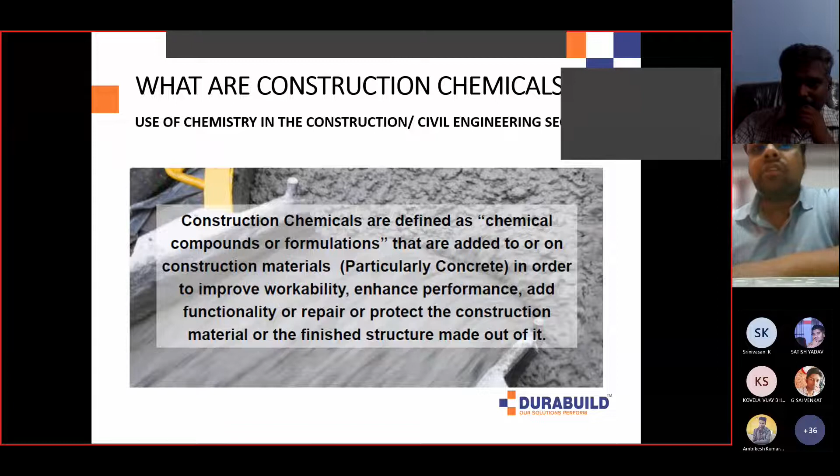So, construction chemicals broadly are defined as chemicals, compounds, or formulations that are added to the construction materials, particularly concrete, in order to improve their workability, enhance their performance, add functionality, repair, protect the construction material, or even the finished structure made out of it.

So, as we go along, I've done this slide for you, because I don't want to make this presentation very boring. First of all, let us understand, I'll try to break it down as much as I can, just like a layman, so that you can get some interest into this field. Then you can go out of this presentation, and do your own study if it interests you. And you can always come back to us.

I'll share my details in the last slide. So construction chemicals is nothing but the pharmacy. We call it the pharmacy of building materials. So I actually had a little, I have a creative side where I wrote this poem when I was doing my master's in structural engineering, where I was comparing cement with human beings, right?

So just like human beings have their life, cement also has a life which has evolved over the years. So just like human beings who can have various diseases or have problems, similarly concrete can also have diseases and problems of its own. So whether in human beings they have a problem of, say, a dehydration, and then you run to buy a glucon D or something to energize yourself.

Similarly, concrete can also have a problem of dehydration, which is called something like poor workability. So all of you have already studied your concrete technology courses, so you know what workability is. So that is nothing but when you don't have sufficient fluidity in the concrete. So that's a problem which many times concrete has.

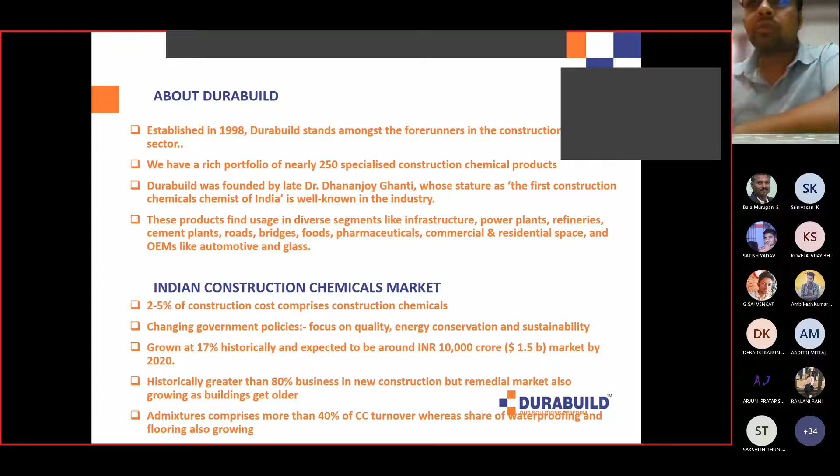First, let us understand why you need admixtures. Let us set the stage right now. Normal concrete is inherently porous, it is very well known. The average total pore content of any M30 grade concrete will be anything between 14 to 20% by volume. Many of you have already read about it.

It's a bit of a revision that mainly there are three major pores you will find inside concrete. There is the gel pores, which affects strength and durability. There is the capillary pores, which affects creep and shrinkage. And then you have entrapped air voids, which is due to poor compaction. There's a rule of thumb that for every 1% of air voids, there is a 5% strength loss.

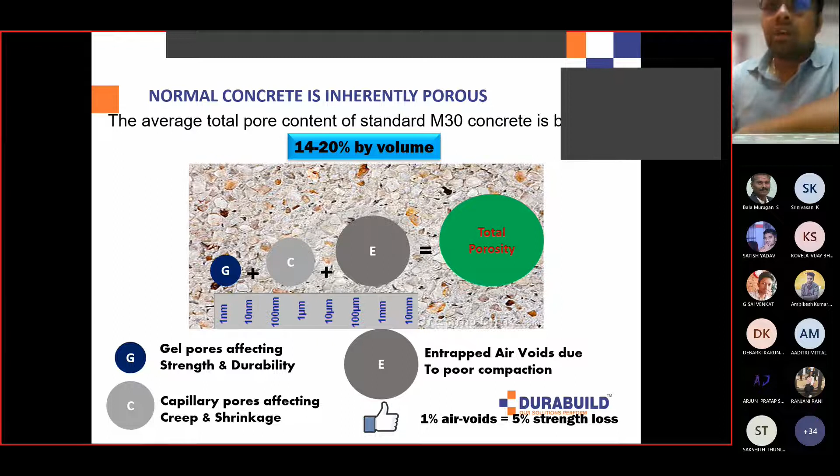Now, why is concrete porous? Let us understand that also. Let us take a typical concrete mix having cement of say 350 kgs. The water cement ratio is somewhere around 0.5. So the total water in the mix will be 175 liters.

Now, as per Neville, and I am sure many of you have read about MS Shetty, the great MS Shetty, the amount of water needed for hydration is only 0.28 water cement ratio, which comes out as 98 liters, needed for the hydration of the cement particles. But still we are adding 77 liters more water, which is also called the surplus or free water.

What is the purpose of adding this free water? That is to give the workability, to give a little flow to the concrete, so that otherwise the concrete does not flow and you cannot place it inside the slab. So this 77 liters of water, the negative side is it migrates to the surface of the concrete and leaves a network of interconnected capillary pores, which will have a volume of around 77 liters.

Now, as per this formula, almost 7 to 8% of the volume of concrete is porous network. Now you will be concerned - if you have a porous network, there is likely movement causing waterproofing issues later on. There'll be many more issues, cracks will happen, shrinkage, and so on. So our idea is, one of the possible ways of overcoming excessive water usage is to use admixtures. What you can do is reduce this water.

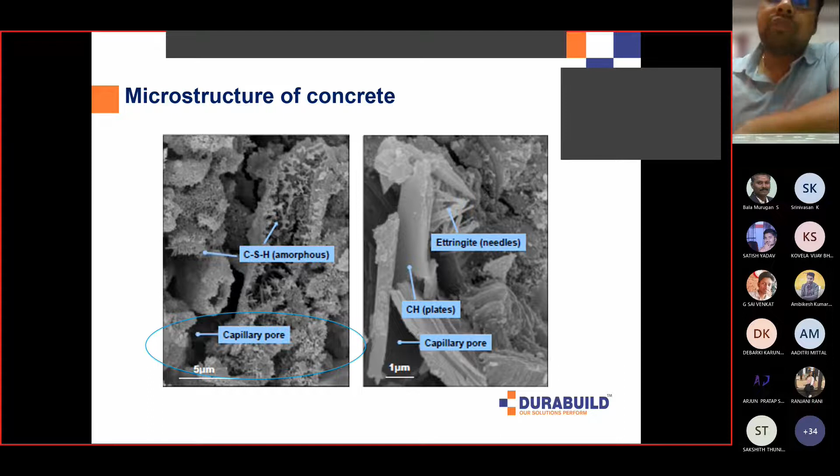Now what we are trying to do is bring down this water, use admixtures, and understand what are the types of admixture.

Let us understand that. In the market right now, there are mainly three types of admixture being used. One is lignosulfonate, that is a first generation admixture. A lignosulfonate admixture would reduce water up to 10%. So if you are having 180 kg of water, it will reduce water by around 15 to 18 kgs.

Then science improved, chemistry improved. Then we got something called naphthalene, SNF based admixtures. Now SNF based admixtures cause water reduction as high as 23%. So you can imagine there is much more water reduction, which would mean the strength increase will also be much more.

And finally, polycarboxylate ethers. These are the latest third, or you can say fourth generation admixtures, which are giving you water reduction as high as 40%, and also giving you strength increase, because obviously if the water comes down, the water cement ratio will also go down and the strength will go up.

Now you must be wondering, by reducing 20-30 liters of water in 1 cubic meter of concrete, how are we getting such kind of flow? The answer is, when you add these chemicals inside the concrete, there is a certain mechanism through which the cement particles liberate the water present within them, and that water is what gives you the flow. So it is not introducing any additional water inside the concrete.

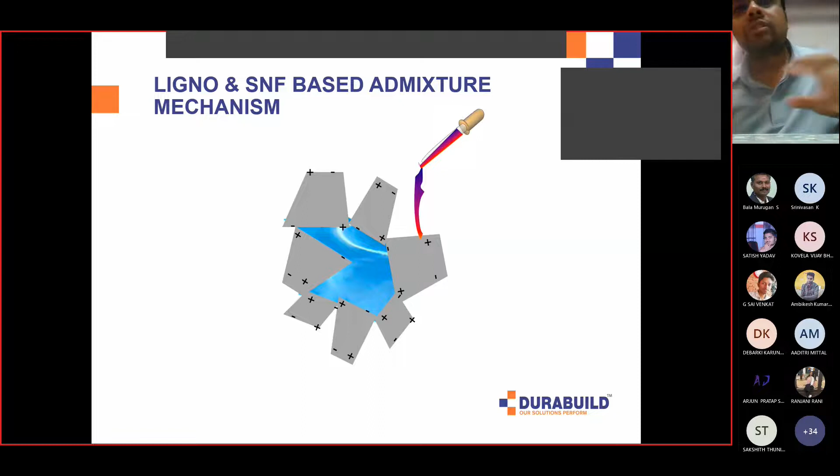And as many of you already know, like charges repel each other. So the moment you have negative charges, the cement particles automatically move away, and the moisture, or the water locked inside, gets released, and that's how you get the flow in the concrete.

Number two, if you want to reduce the bleeding and the segregation, one of the ways of doing it is to reduce the water content, and that again will happen only by using admixtures.

Next is cold joint removal. Why am I saying cold joint removal? The same thing - when you are concreting and then leaving it overnight, and then the next day, or maybe continuing after 3-4 hours, the concrete need not set. The concrete has to be, somewhere we say it is still alive, so that even when the next level of concrete is poured inside it, the two get intermixed. If this concrete sets and then you put another layer of concrete, again a joint will be formed, which can be a potential point of water ingress and so on. So for that also admixtures are used.

Also, it reduces the drying shrinkage. That is again a byproduct of reducing the amount of water content.

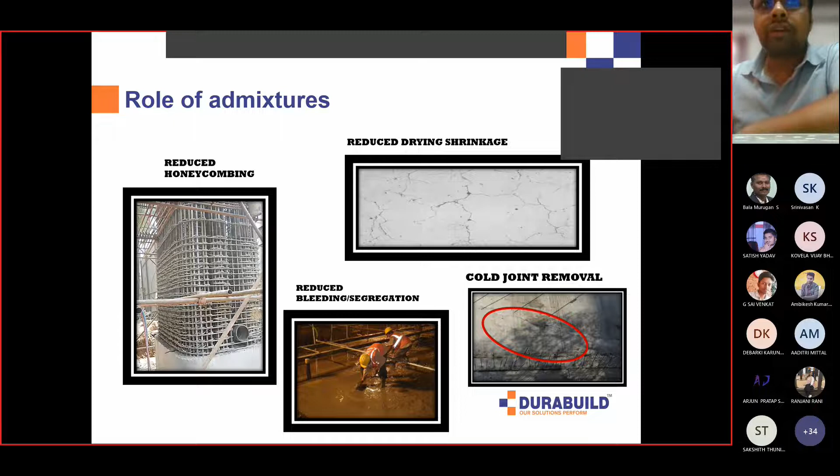Another role of admixtures is ease in transportation and placing. You can see this particular photo, and here's this video again, just to put things into perspective. You'll be able to understand the advantage of having admixtures. I'll fast forward it a little bit.

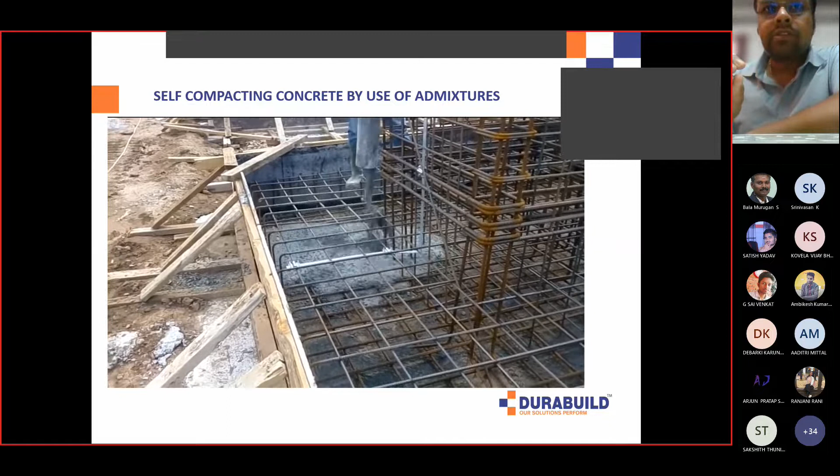You can see this is a dense structure. Now look at this concrete. It's so beautiful, almost like a self-compacting concrete. It is compacting on its own, flowing on its own. It doesn't need to be taken out using trowels like people normally use. It is flowing on its own.

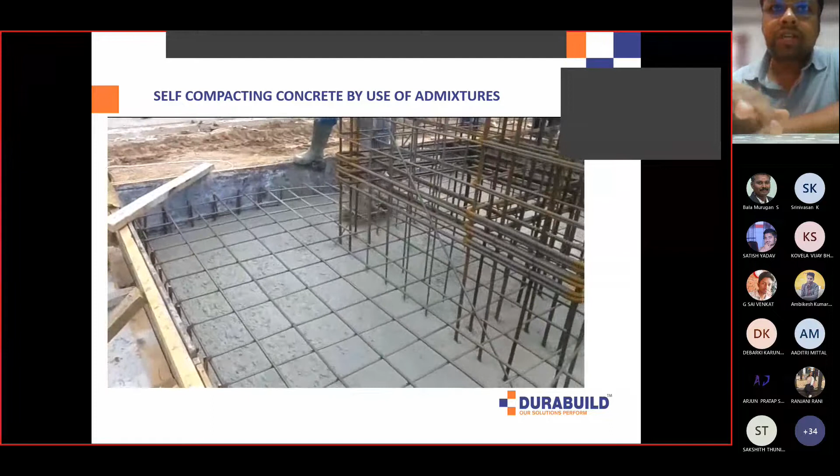Look at the concrete mix - there is no segregation, no bleeding, everything is moving in unison. Imagine cement, aggregates, everything has a different specific gravity, and still to bring everything together and make it move easily together is only possible through the use of admixtures. It's a very good video to understand the potential of an admixture.

Fine, I think we will just quickly move on to the next slide.

That's understood. So now we will talk about waterproofing. This is a very important field because, as sir said a while back, Tamil Nadu, Chennai is going through a bad time right now with all the rainfall. So there will be huge requirements for waterproofing.

First, let us understand what waterproofing is. Waterproofing is the formation of a barrier to prevent passage of water through concrete due to various water transport mechanisms involving penetration through concrete and openings. In short, it is a way to create a barrier to prevent any moisture ingress.

In technical terms, waterproofing deals with situations in the presence of hydrostatic pressure. What is hydrostatic pressure? If you have a concrete water tank, the lowermost slab, or a swimming pool, when you put water on top, say 2 or 3 meters of water height, it will exert some kind of pressure on the concrete slab.

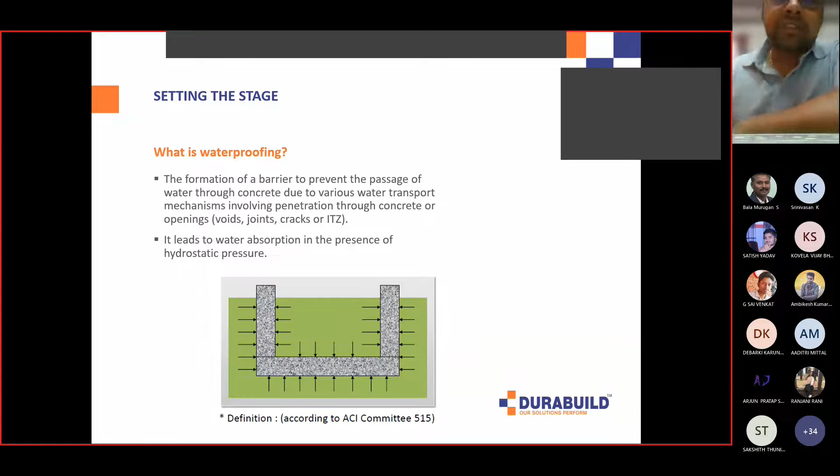This height of water is likely to cause issues because under hydrostatic pressure, this water can penetrate through any cracks or joints present inside the concrete and cause issues with the steel. So waterproofing deals with the presence of hydrostatic pressure, whereas damp proofing is the reverse - it is in the absence of any hydrostatic pressure.

Many of you, if you go back to your old homes - I'm sure today all of you are well endowed with good homes - but earlier, during our dad's time or grandfather's time, the basement floors usually faced what we call in Hindi 'papdi' - you'll see dampness and seepage happening at the ground floor.

Now you'll say there is no hydrostatic pressure there, but how is that water reaching there? It is because of capillary action - the water present in the ground floor or below the ground area, that moisture rises through capillary suction, causing dampness and rising up the walls of the ground floor. So this is actually not a waterproofing problem, it's a damp proofing problem.

Now you need to understand there is a difference between leakage, seepage, and dampness. Leakage is a continuous flow of water - that's when you say leakage is happening. Seepage is the formation of water globules, but not necessarily moving - it will just be there. Thirdly, dampness is just visible moisture, as I was talking about.

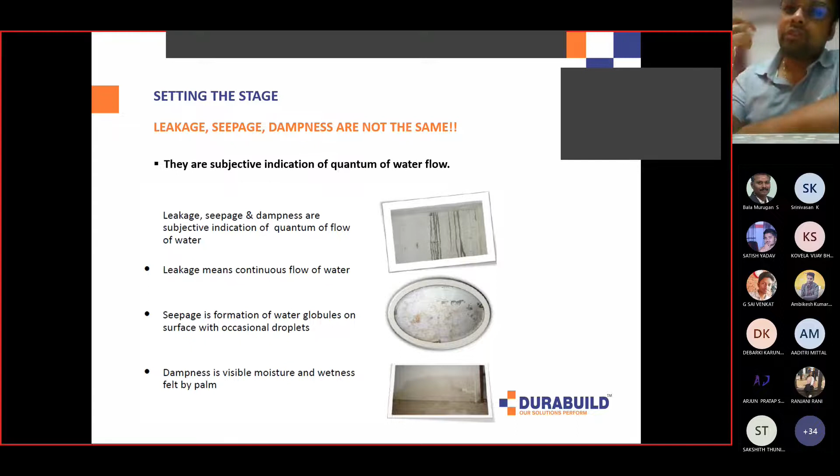You can see this last photo - there is dampness and wetness which you can feel by palm. If you run a hand over it, you will see there is a lot of moisture there. So that is a dampness issue.

Now let us understand why we need waterproofing. It is important to go behind the science of why waterproofing is needed.

Porosity and permeability are not the same thing at all. A highly porous material might perform well as long as the pores are not interconnected. But in a case where the pores are interconnected, even if the pores are less, it is a much more dangerous situation. A high porosity and low permeability case would be when the pores are not interconnected, but the moment they are interconnected, you allow free passage of water to the steel and the entire concrete mass. So you may have a highly porous concrete that is not highly permeable, and at the same time, a less porous concrete that is still highly permeable.

This is not porosity because of any one of our actions, but what happens on site because of some anthropogenic or human actions, or some mistakes that the quality manager of a site makes, there can be reasons of permeability inside concrete as well. One reason is poor compaction. If you don't compact the concrete, you will not release the entrapped air voids, and those air voids can be potential points of entry of water.

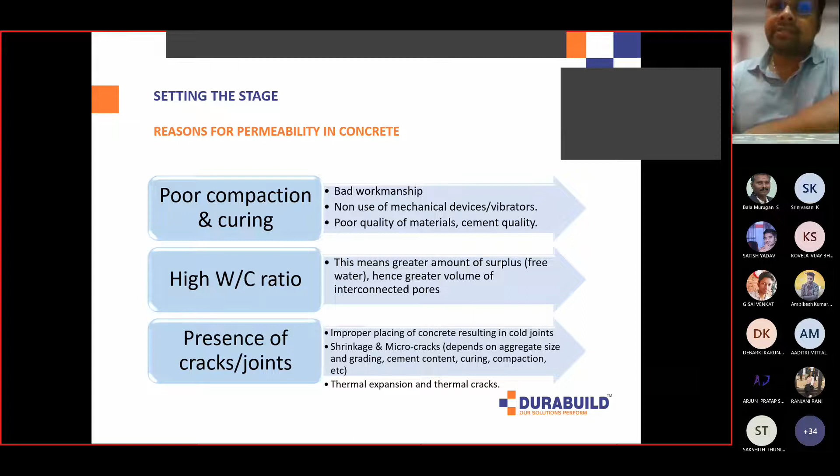So what will happen is once these cracks interconnect, they will leave a kind of interconnected line, and then you will have steel somewhere at the bottom. Let's just see what happens.

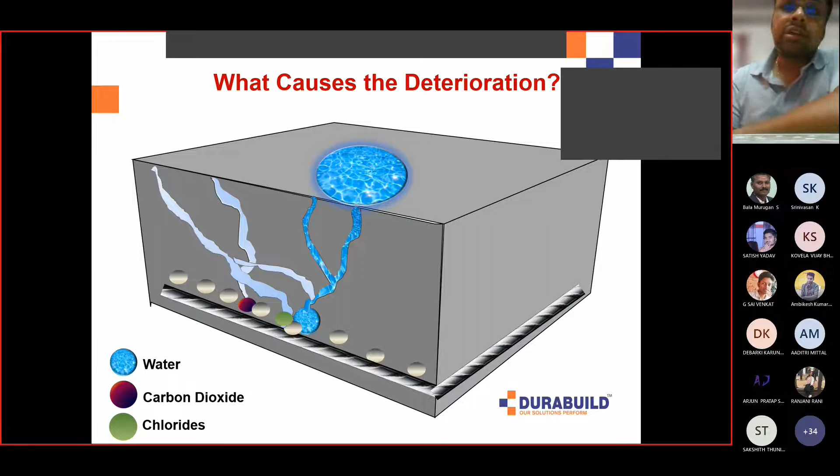The water will start entering inside that concrete and come closer to the steel. Then carbon dioxide will enter through those pores into the steel, and then you will have chlorides if it's close to the sea water, or close to a beach, like Chennai which is next to the coast, so that's where you will experience this kind of problem. Now, the moment these three ingredients reach inside the steel, they initiate a process called corrosion, which I am sure many of you have already read about.

I don't want to talk about it in detail, but simply put, in corrosion you will have two places: there will be an anode and a cathode. So all the rust gets accumulated at the point of the anode, and the moment that rust accumulates, the volume of this rust is almost 6 to 7 times more than the steel itself. So automatically, to accommodate that volume, it will crack, and that's where the cracking and spalling happens.

Many of you already know that is why people say you should always try to keep the concrete in an alkaline state, because the moment it is in alkaline state, you will not have these corrosion problems. A classic analog I can use is even the human body. We are happy when we are in an alkaline state.

The moment you eat outside, some kind of pakoda or oily food, I think in South India dosa and idli are very safe foods, but sometimes when you are having some oily food outside, it tends to cause acidity, because that reduces the pH inside our body and causes us issues, and then we are huffing and puffing.

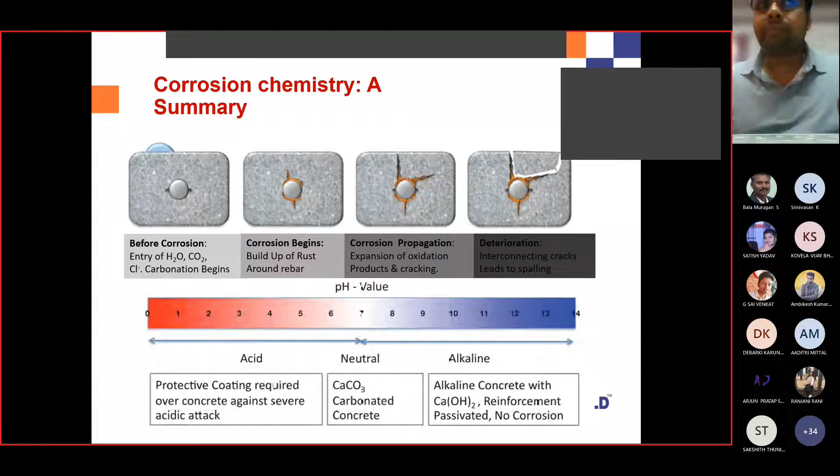So overall you can see there are around 9 to 10 deterioration mechanisms, something more than 11 in fact, but I identified all these deterioration mechanisms inside concrete: erosion, thermal cracking, drying shrinkage, plastic shrinkage, alkali aggregate reaction.

Many of you have read about it, I think. Chemical attack, freeze and thaw, rebar corrosion through external chlorides to internal chlorides through carbonation.

So all of these deterioration mechanisms inside a concrete, what is the common point to all of them? It's water. So it is very clear that we have to find a way to keep water outside the concrete.

Now you will be confused, as I was when I first heard about it, that in one place we say water is mandatory for concrete because it causes hydration. On the other hand, we say this water is also the main reason for all the problems the concrete is facing. So it's a double-edged sword, you can say.

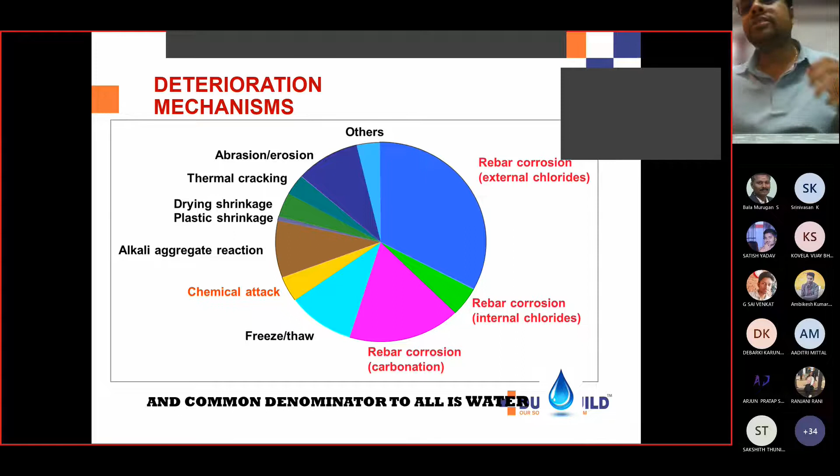So in the plastic state, we want water to be there inside the concrete because that is where the hydration of the cement particles is happening. But the moment the concrete has reached a hardened state, you do not want any water to enter inside the concrete. And what is one of the ways of doing that? It is through waterproofing. And that is where we have arrived at waterproofing is important.

Earlier, many of you must have seen our great grandfathers and all. They use something called the bucket technology. The moment there will be some seepage or leakage from some kind of ceiling and all, they will use a bucket, and the entire problem will be resolved.

But now luckily, earlier there were uses of bitumen. People used to think that black is waterproofing. That is a wrong thinking to have. Never have that thinking. Bituminous products, first of all, are health hazards, many of you know. Number two, they do not have any UV resistance. They're likely to degrade over a period of time.

So these are old school ways of waterproofing which people used, and now people have moved out of that system. Another way of doing waterproofing earlier was creating a slope. I feel that making a slope is the best way to waterproof any terrace, because the moment you allow water to sit over the terrace for a long period of time, you will have waterproofing issues. So one way of doing it is to make a slope so that it goes to the nearest drain point, and then the water gets collected and goes through the pipes to the eventual place.

So now we'll talk about the types of waterproofing. Waterproofing is essentially of two types: integral and external. Integral waterproofing is where you are putting the waterproofing material compound inside the concrete, and that is where the action happens. And the second way of doing it is you let the concreting happen.

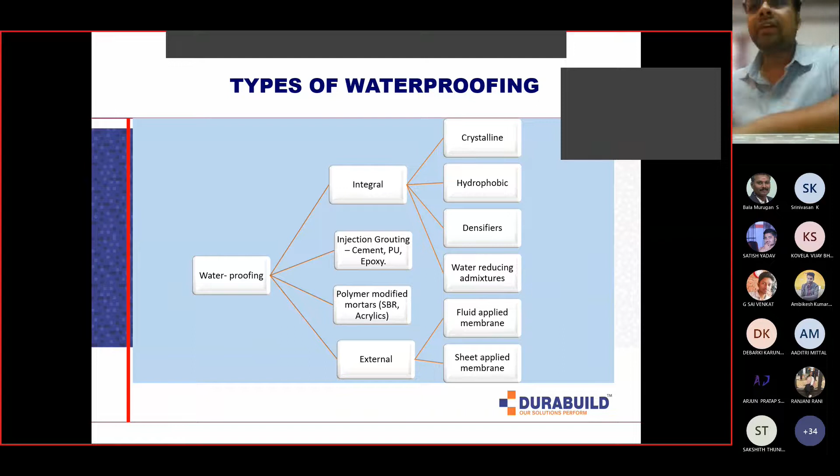It's more of a post-construction treatment, where the concreting has happened and then you are applying a coating or a sheet membrane on top of it, and that is how you are waterproofing.

What are the typical properties of any waterproofing material? I think I will skip this since it is very well known. A main property should be that it resists water, that is very important. Other than that, it should have good UV resistance, and it should have good bonding with the base substrate. So all these things should be there.

So let us talk about crystalline waterproofing, how it looks like. This is one of our products, which we'll put the video on, maybe you will be able to understand how a crystalline product works. It is again a type of integral waterproofing.

Crystalline waterproofing, I'll give you a bit of a brief. These are like powders, looks like a cementitious powder. It is added inside the concrete when you're making it. This crystalline powder reacts with the byproducts of cement hydration. The moment there is a leakage, there is water moisture ingress, and in the presence of that moisture, the entire crystals get activated. So the moment those crystals are activated, it physically blocks those pores, and automatically you get a waterproof concrete.

So we'll see this video, you will be able to understand.

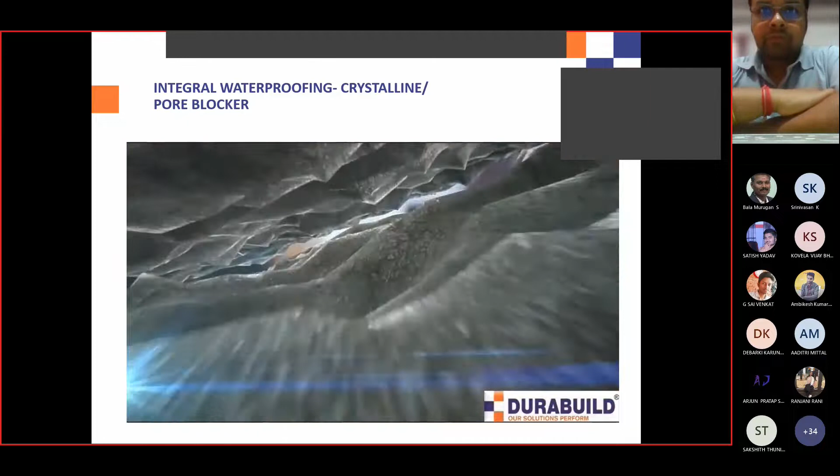You can see that when the moisture enters, crystals are formed, and these crystals are the ones... you can move to the next slide now.

So that is one. Other than that, there is another form of integral waterproofing called hydrophobic pore lining products. Hydrophobic pore lining products are different from the pore blocking technology. In pore blocking technology, it is physically blocking the pore. Another way of doing it is if we can line those pores with a chemical which can resist water. So that is more of a chemical mechanism, whereas the earlier one was more of a physical mechanism.

These pore liners, many of you must have heard about, say silicone repellents. Imagine when you have a sunmica table and you put a drop of water on top of it, the water will remain like a drop, a bead effect will be there. It would not absorb that moisture. That is because of this kind of product there, silicones, siloxanes, and silanes, that's another family of products. I'm not getting into technical stuff, but you need to understand there are pore lining technologies which can create this kind of effect, as you can see.

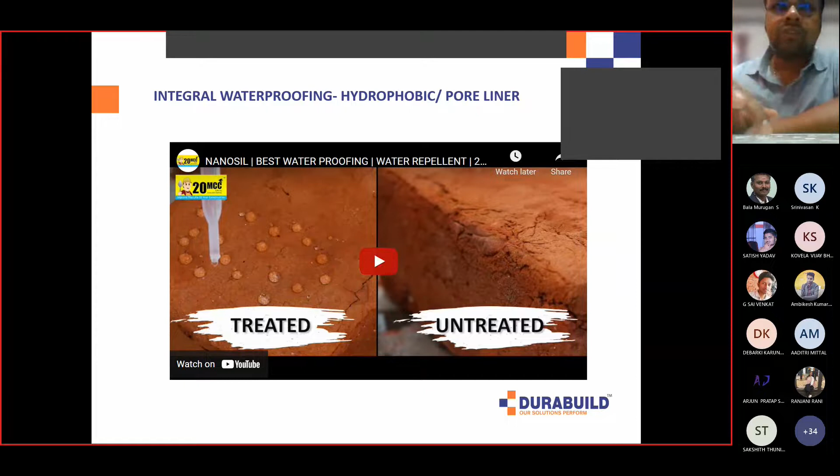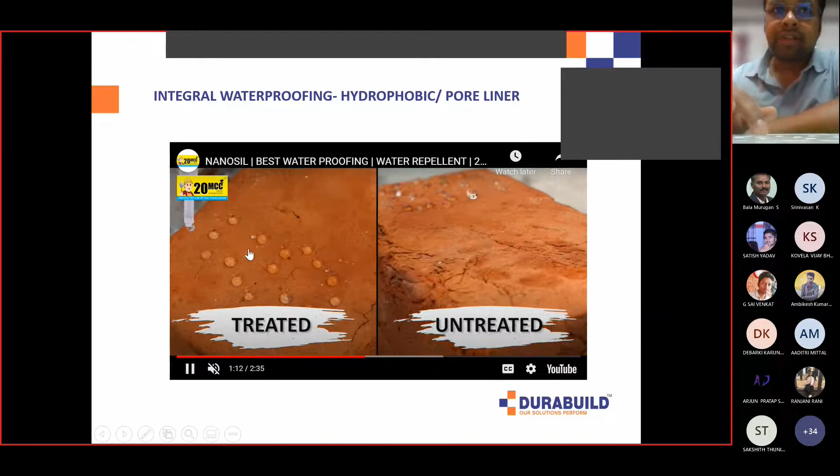So we'll just quickly show you, so you can see why this effect is happening, because of the presence of this kind of coating, which can either be applied as a coating or added inside the concrete. So you can see this is the effect it will form, it's a bead effect. And here, without this pore lining technology, you don't get that effect.

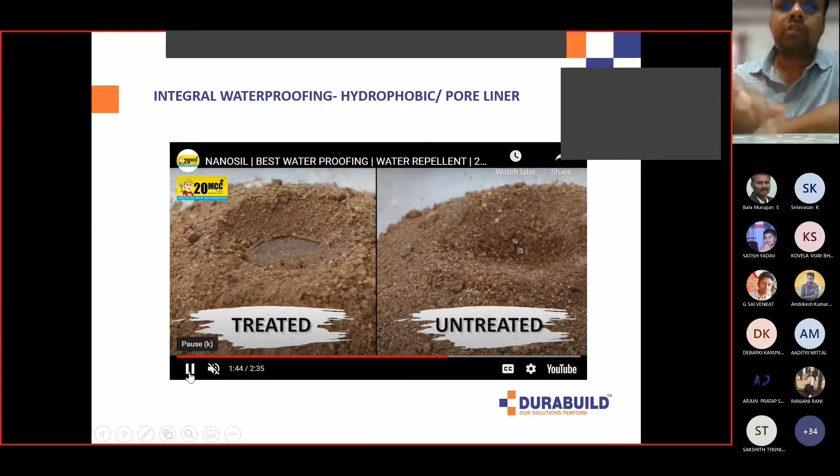Remember, this is not any physical mechanism, again it's a chemical mechanism. It works under the principle of surface tension. When you are applying this coating, it reduces the surface energy of the concrete particle, and automatically the moisture, because it has higher surface energy or surface tension, does not absorb into the concrete. So again, this is the second type of integral waterproofing, which can be added inside the concrete.

The third type of integral waterproofing, many of you have already studied in your classes, is called microsilica, fly ash, and GGBS. These are also called pozzolanic materials. It has reactive silica, which reacts with the byproducts of cement hydration, creating more calcium silicate hydrate gels, which give additional impermeability inside the concrete. So this is also a very traditional way of doing integral waterproofing.

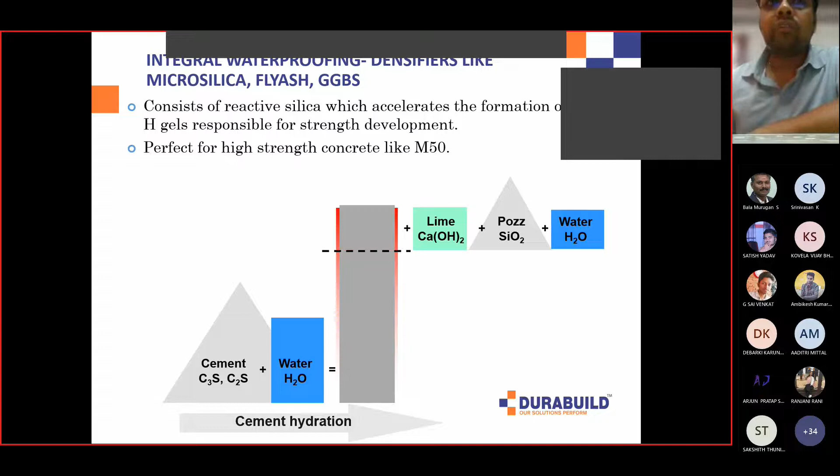The last way of doing integral waterproofing is to simply reduce the water cement ratio, which we have already talked about. The lower the water cement ratio, the more refined your pores will be, and they will not be interconnected. This is one of the easiest ways of doing integral waterproofing. Superplasticizers can be used for reducing the water cement ratio.

The main advantages of integral waterproofing are that it makes a very durable concrete. It is not prone to any surface tears or damage, it does not require any maintenance, and it reduces construction time. On the other hand, some people say they are not very effective, so there are two sides to the story. But overall, right now, integral waterproofing products are doing very well.

Many of you must have seen advertisements of companies selling integral waterproofing, like Dr. Fixit, LW Plus, with Amitabh Bachchan sitting with two products, one being URP Joda. These are marketing gimmicks. One is the LW Plus, or in our case we have a product called D001, which is also an integral waterproofing product. When you add it inside the concrete, it creates the waterproofing effect.

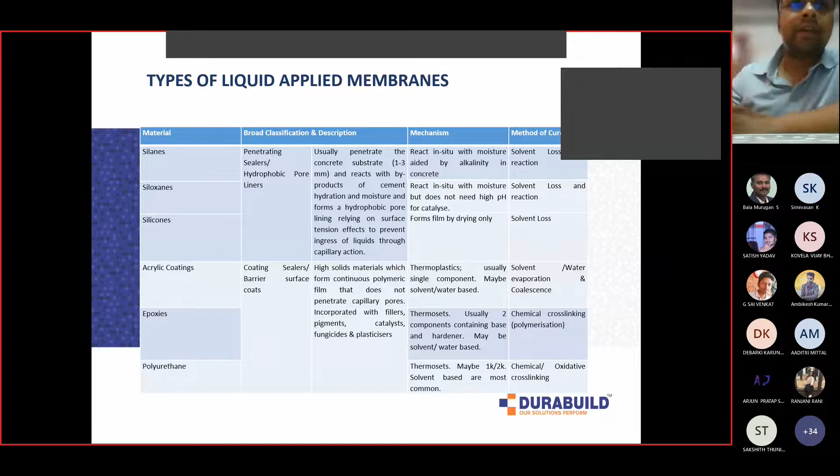Now we will talk about external types of waterproofing. I won't go through the details of a single product, you just need to know the main families or chemical families constituting exterior waterproofing. One is silanes, then siloxanes, silicones - these are all coatings, transparent liquid coatings applied on the concrete. Then you have acrylic coatings, epoxies, polyurethane. I'll show you some videos so you can understand it better.

So these are mainly the 6 families of liquid waterproofing coatings. Earlier was integral waterproofing; these are the surface applied or external waterproofing. We will talk about the most popular waterproofing right now, which is polymer modified cementitious coatings. A polymer modified cementitious coating is mainly two parts - it's a two-pack product. One is the polymer, one is a cementitious powder.

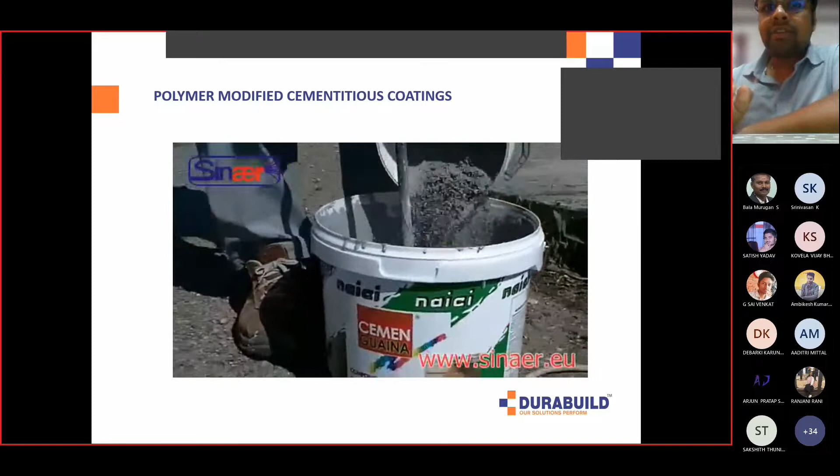The polymer looks like milk. You can imagine an emulsion like milk, which is mixed with the cementitious powder in a desired ratio, and then you make a slurry that can be applied on the surface. You can see in this video that there was a polymer and the powder is being added inside it, creating a slurry like this. This slurry, when made, can be either applied by a brush or sprayed.

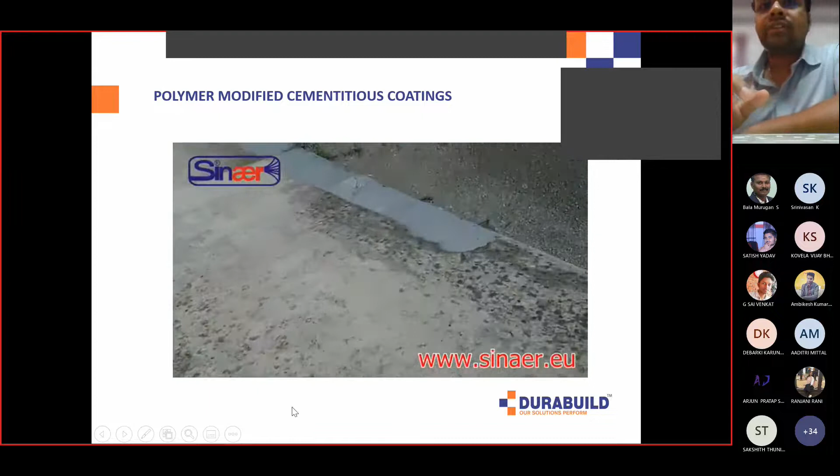You can see such a smooth creamy mix has been formed. Now he has put it in a hopper and he will spray it. You can see it's a very porous surface that he is applying it on. It is being done in usually 3 layers.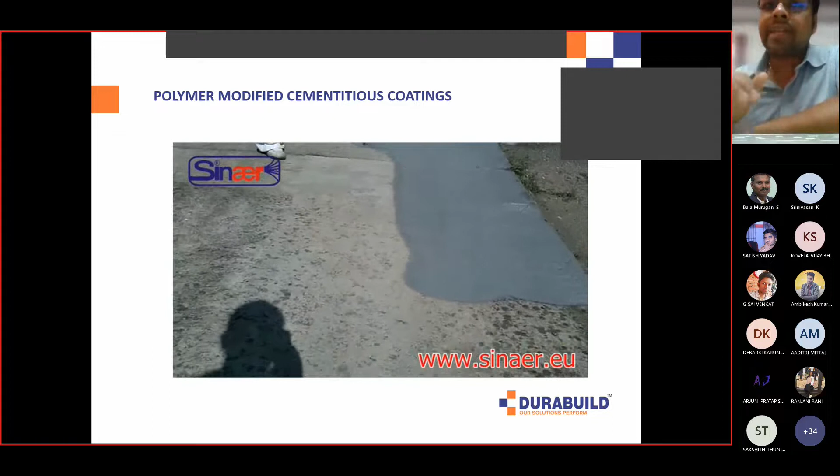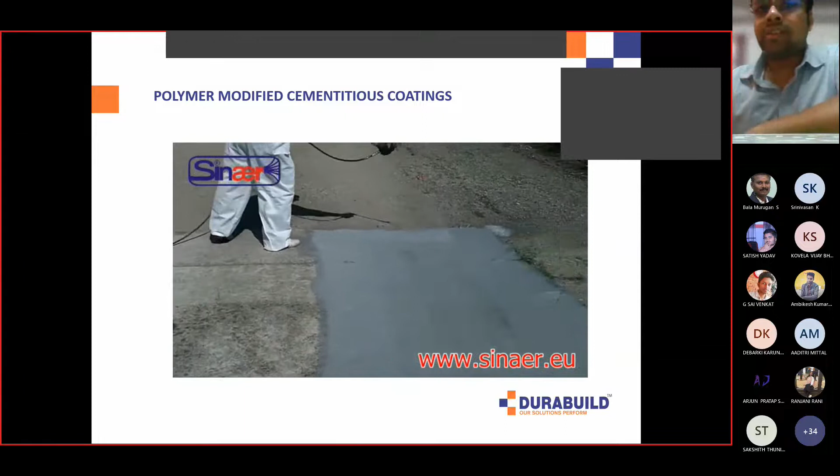Then you can apply the second layer. This is a cementitious product, an acrylic modified cementitious product. What it does is combine both the good properties of the polymer and the cementitious material, giving you high performance.

Now we'll move to another type of surface coating product - acrylic based elastomer coatings. Here you do not have a cement or an emulsion, it simply looks like a paint. You simply take it from the bucket, put the brush inside it, and apply it.

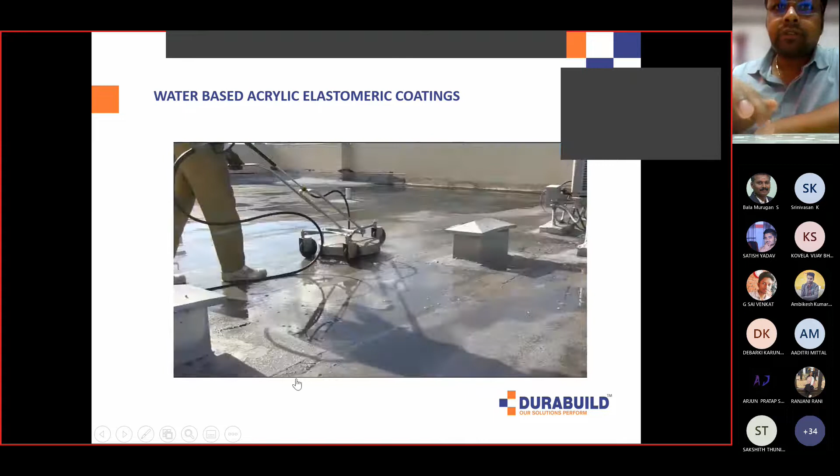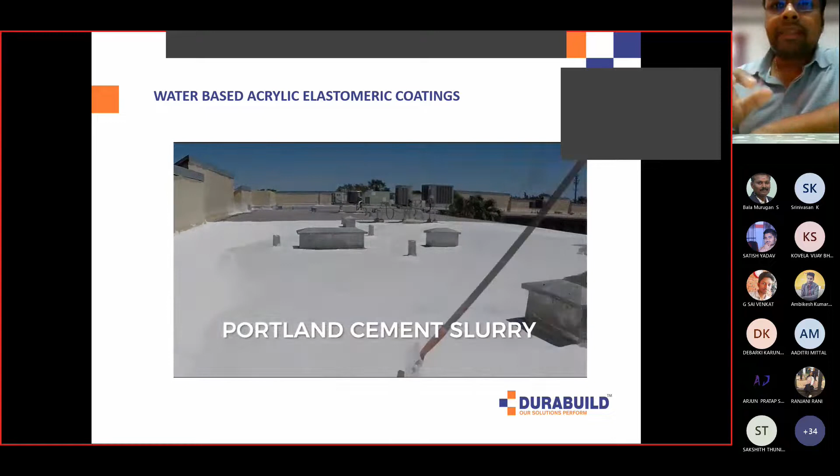This is the surface preparation. It's very important that before any coating is done, you have to prepare the surface. The surface is prepared mainly by making it in a slightly SSD condition, that is, the surface is slightly moistened with water. Then they are applying a kind of cementitious slurry, and the entire coating is done through a brush.

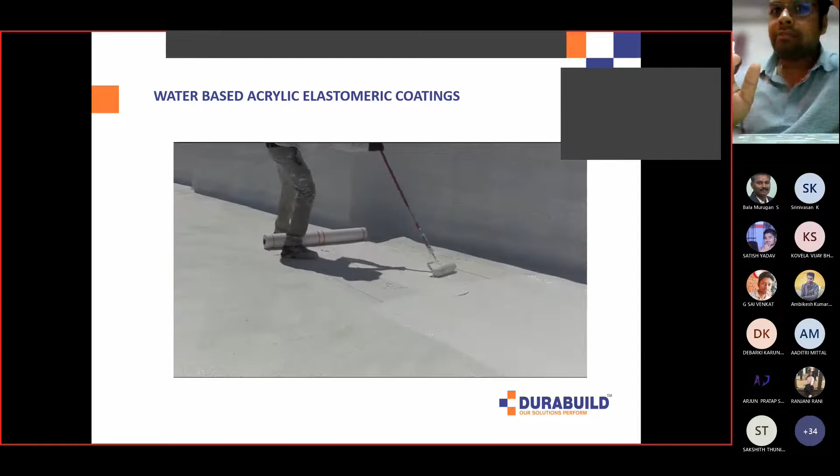In this case, they are using something like a glass fiber mesh between the first and second coat. The main purpose of adding this mesh is it gives more tensile strength to the entire coating, so the coating can be protected from any kind of cracking in the future. You can see it's beautifully done, all white, which gives very good solar reflectivity and keeps it cool.

So in this particular case of coatings, you can have two types of systems: a solvent-free and a solvent-based system. I don't need to cover that because it's a bit too advanced for you.

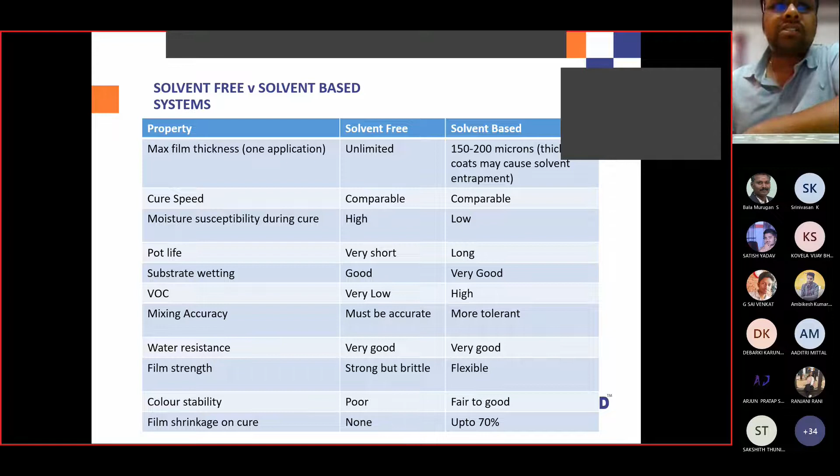Now, other than liquid applied external waterproofing, you can also have sheet membrane systems. Right now in the market there are mainly around 5 kinds of systems, like an APP system or an EPDM based system. Now these are very high-end technical terms, so you don't need to worry about it.

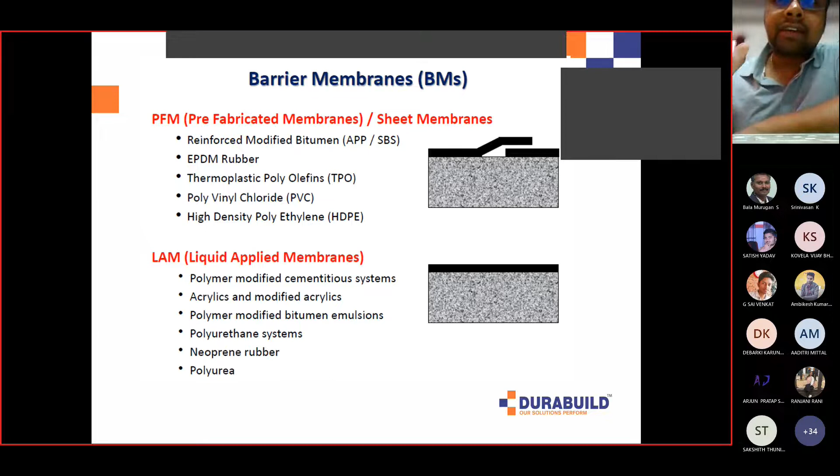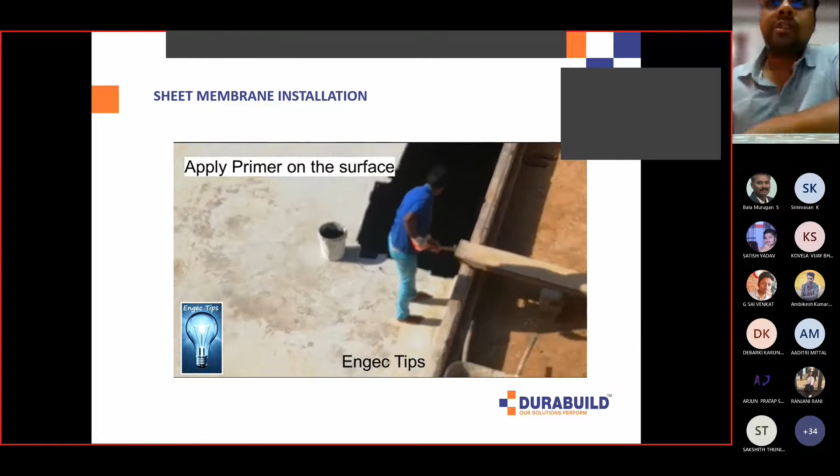I'll just show you a video because this is one of the very commonly used systems that people are using - this is a kind of sheet membrane system. So in this sheet membrane system, what happens is first the person applies a primer on the surface. These are bituminous primers which you apply on the surface, and then the membrane, which is a preformed membrane, is already coming in rolls.

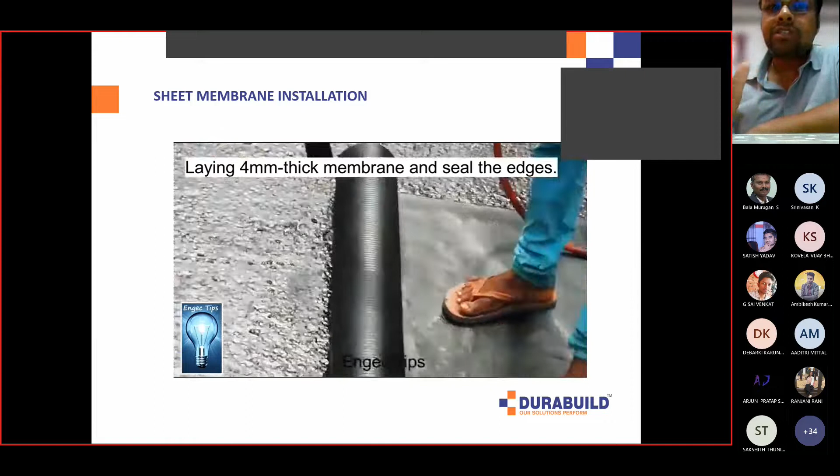You simply need to use a torch. A torch is like a heating flame. Through that flame, what they do is melt the bitumen which is beneath that particular sheet. That melts, and that bitumen is the one which gives the adhesion to the sheet membrane. Yeah, you can see this.

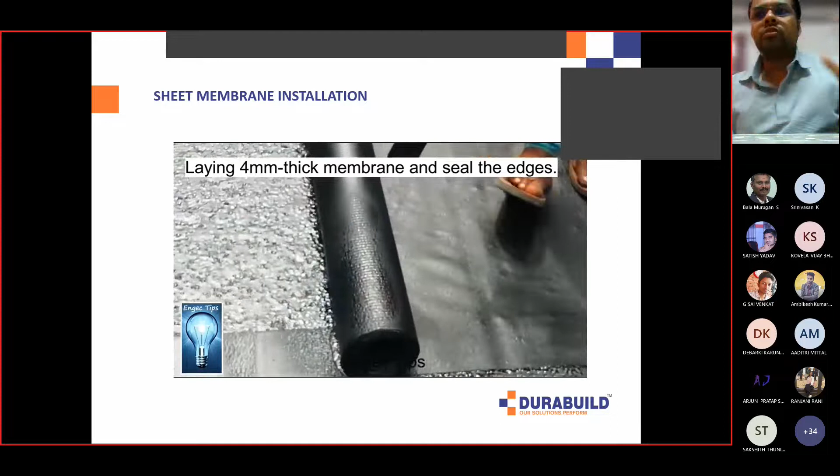So as you can see, there is an overlap. It usually comes around 1 meter wide, and there's around 20 meters length in these rolls. So these rolls are simply laid, melted, and then moved on.

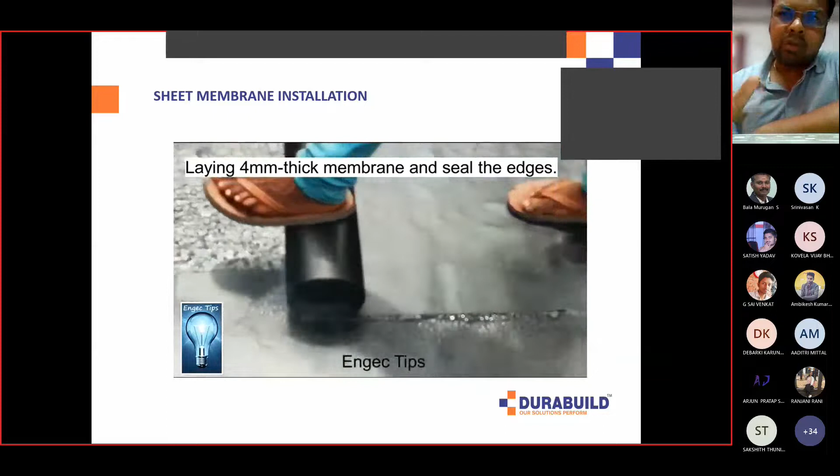This is one of the very old school systems right now. There's a problem with sheet membranes - as you can see, the bonding which is done between them always has these joints, these seams. My concern with these systems is that these joints generally open up after 3-4 years down the line, and that becomes a point of moisture ingress. So I don't prefer these systems. I would much rather use a liquid applied coating, which I showed you in the video before, where you can apply a coating and it is a seamless coating.

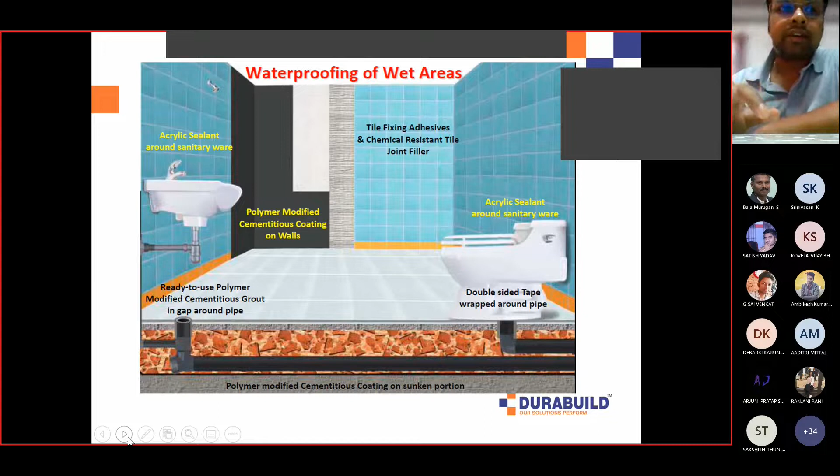Now this is again a simple diagram showing you the waterproofing of a wet area. So if you have a bathroom where you have to do waterproofing, you can use various kinds of construction chemical products to ensure the entire waterproofing of that inside area. Now, that is waterproofing - over.

So now I will be talking a bit about other segments like industrial flooring. In the industrial flooring segment, there are various kinds of additives or products available to harden the top layer of the floor. You can understand India has a huge demand for warehouses, factory floors - imagine Amazon, Flipkart, Walmart of the world. They have so many big warehouses where heavy machines or heavy vehicles are being moved on top of it. So there are chances that the top layer of the slab in these warehouses may chip off sometimes. So to harden that particular top layer, there are various ways you can do it.

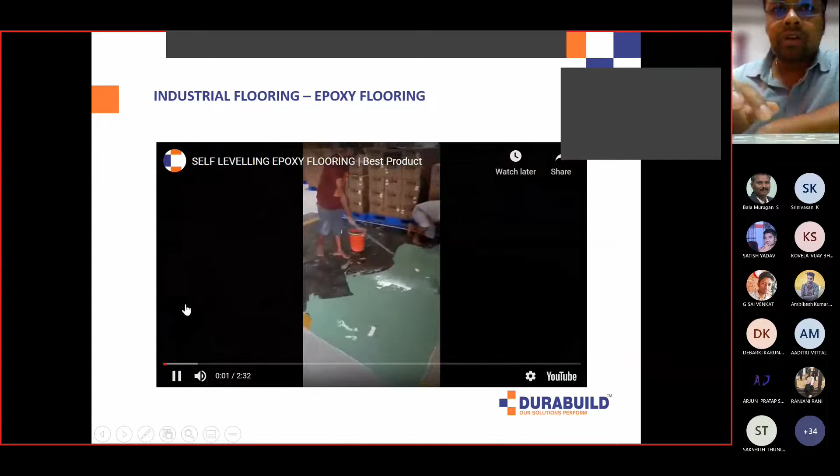Either you can add some kind of hardeners to the concrete at the time of concreting itself, or there's something like epoxy flooring. I'll show you this, one of our products being used in Bangladesh, so you will understand how it looks like. In epoxy flooring, there are four components: one is a resin, one is a hardener, one is a filler - a filler is nothing but like sand, it looks like - and then there is a pigment. The green pigment that you see over here was given to them. Usually what happens is you mix all four together and get a slurry like this, and this slurry is then laid on the floor using various kinds of spiked rollers and all that.

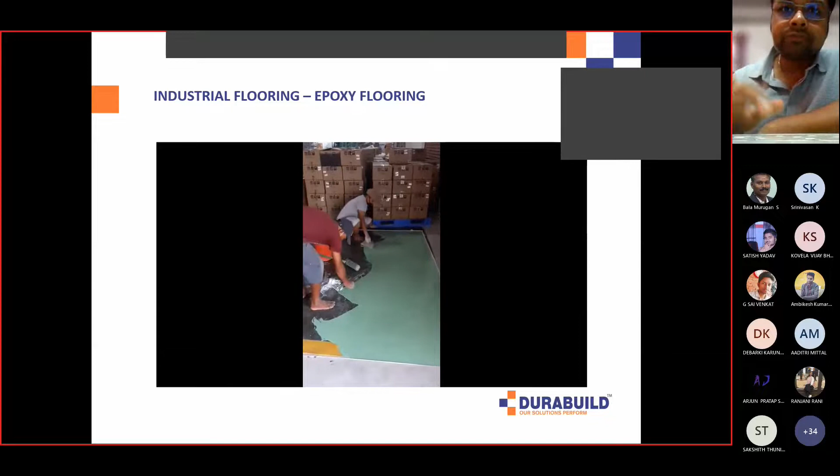So as you can see, he's laying this particular compound. He's pouring the same thing, and it is self-leveling only, so it levels on its own. Right, I'll move to the next slide.

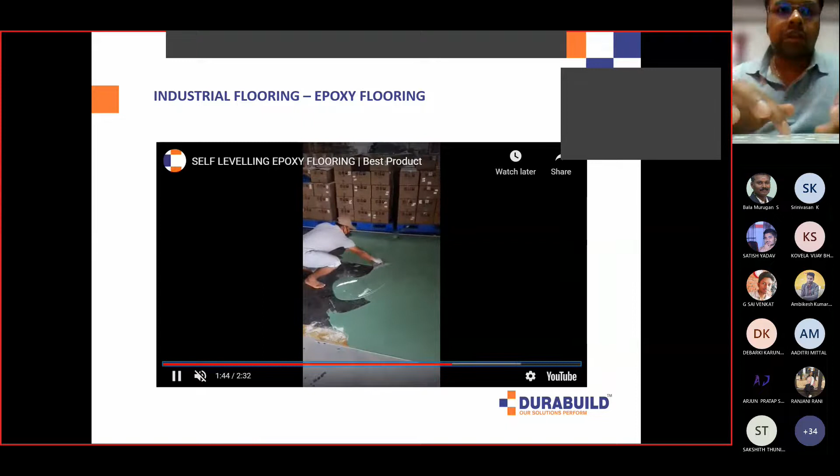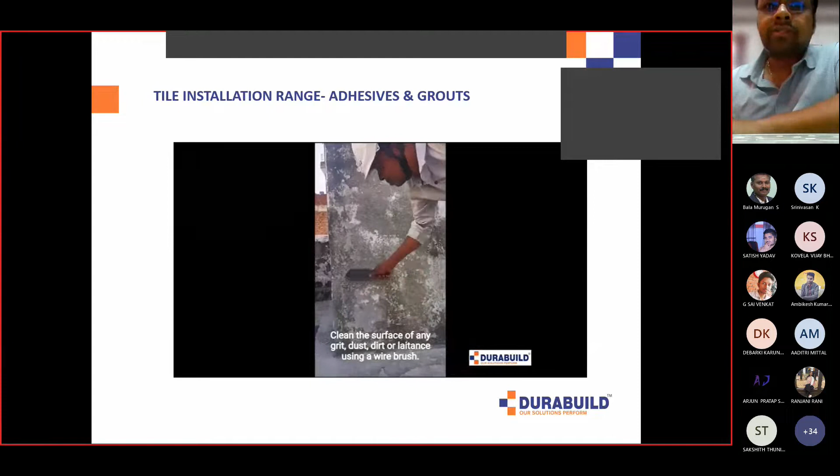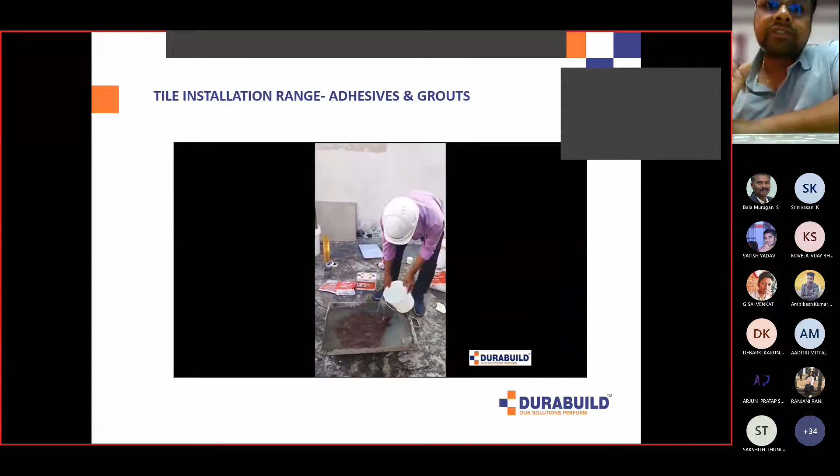First of all, you need to prepare the surface where the tiling is going to be applied, and then you moisten the surface, which is very important, because for the cementation, if you don't moisten it, the cement will absorb all the moisture and create a puffery effect. So you can see mixing of the tile adhesive, he will do that. You can see he mixed the tile adhesive, so he's applying it.

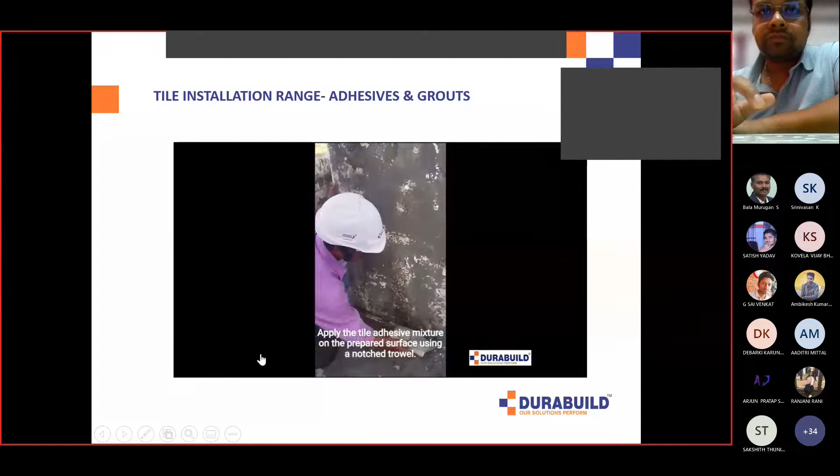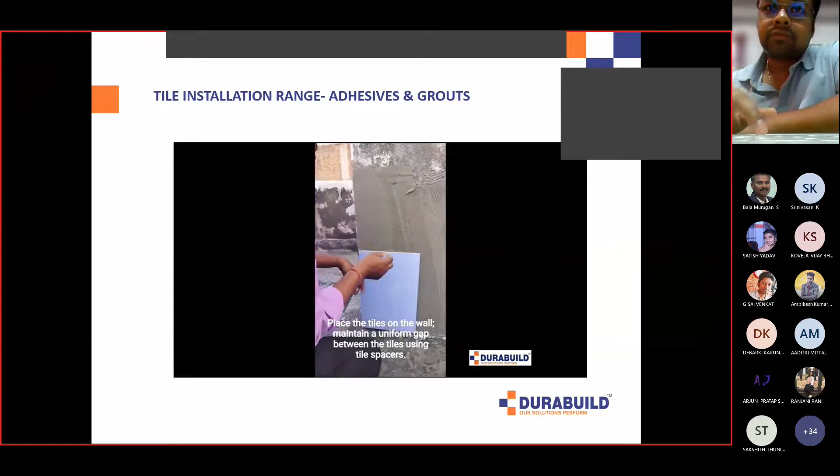So now you can see he's applied it, and now he's going to put the tile in this. You can maintain a sufficient space between the tiles, the tile spacers.

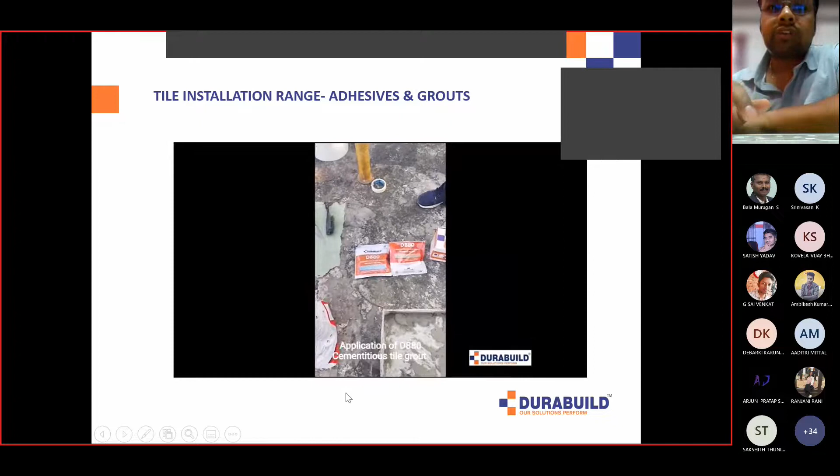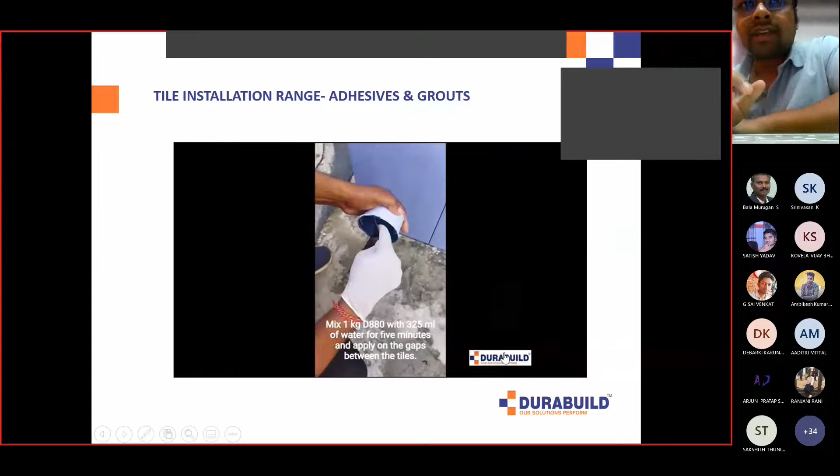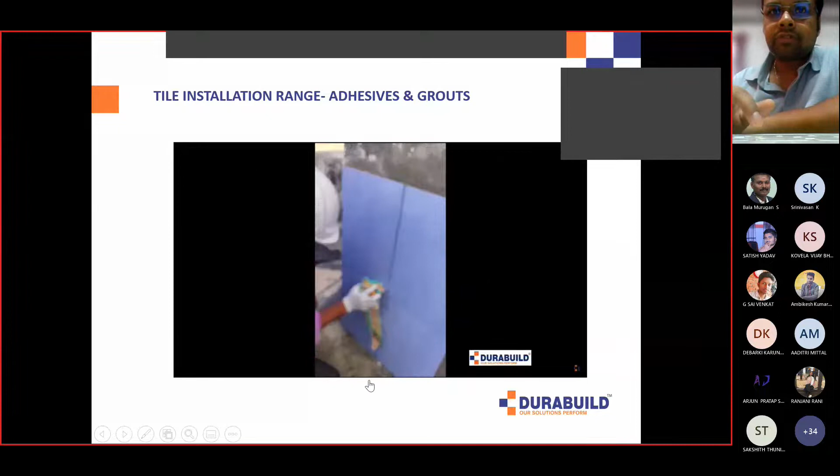Now you can see the application of the tile grout. Tile grouts are nothing but the joint fillers between the tiles. It is mixed, it looks like a powder, then it is mixed with water, and it forms a paste. He's taking a straight edge, a putty, call it a putty, and simply applying it. Then finally what he'll do is he'll clean it, giving the final finished look. Okay, we'll move to the next slide.

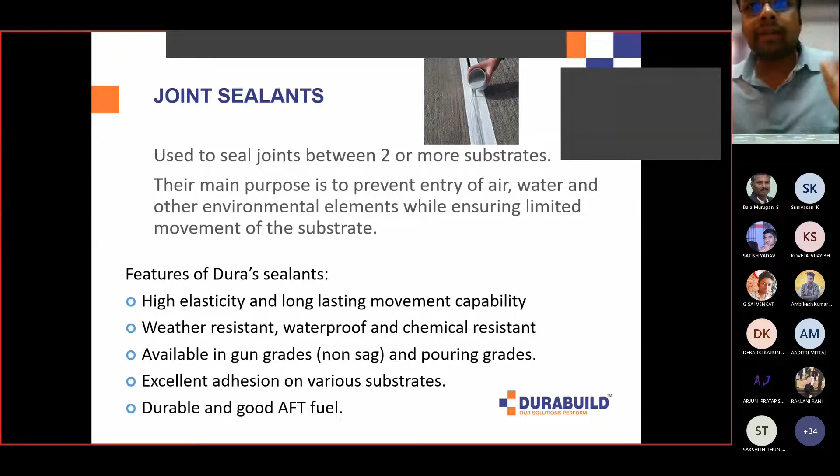So then, next is joint sealants. Now as I already told you, there are various kinds of sealants - silicone sealants, polysulfide sealants. On roads, when you are moving through them, you will see there are joints and you feel a little bit of a bump when moving through a PQC, pavement quality concrete road. These are highly elastomeric products, applied in liquid form, and once it dries out or cures, it forms a very rubbery kind of material. These materials are mainly used to seal a joint between two substrates, and their main purpose is to prevent the entry of air, water, or other environmental elements while ensuring limited movement of the substrate.

The next segment is repair and rehabilitation, which again is a huge segment. For each segment here, I'm just giving you a brief so you can understand what construction chemicals are. Just take the keywords, note them down. You don't need to know everything in detail in this session itself. If you're interested, go back and read about it, because each segment is very detailed - you can actually spend days talking about each one. So here I'm trying to summarize 10 segments in about an hour, and I can see it's already 1 hour 14 minutes. Anyway, I'm just 2-3 minutes away from the end of my presentation.

So repair and rehabilitation products, again, there are many various kinds of products which you can have in repair and rehabilitation.

There are cementitious based products. Where would you use a cementitious based product? For example, if you have a column which has kind of spoiled or broken up in places, you can repair it using various kinds of cementitious repair, free flowing repair mortars. You simply need to pour, or in some cases use a trowel to put that repair material.

Don't use cement sand, that is an old school way. Never use that, it will crack again. Use materials like micro concrete, or other kinds of repair mortars. These are ready to use, you just need to mix water with it. The best part is that they give you strengths as high as 40 to 50 megapascal, 28 days strength, so that's a better way to go about it.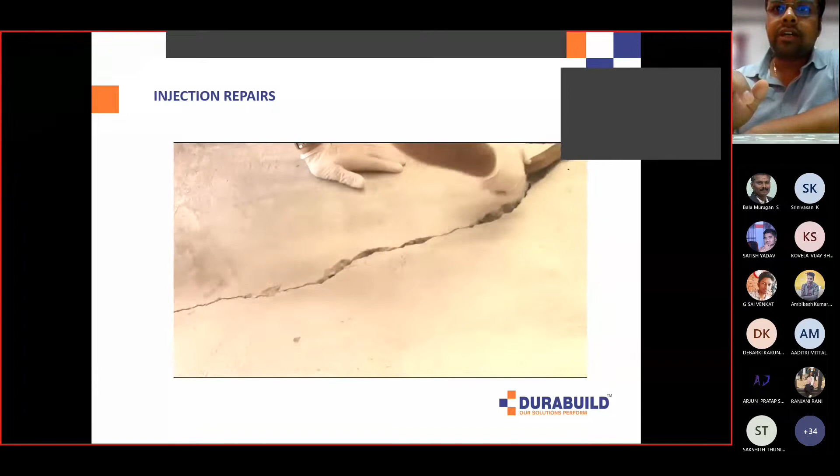You have a cracked surface. What he's going to do is simply remove all the dust and dirt around the cracks using a wire brush, and then he's going to use this kind of bonding agent, a pasty product, which he's using to seal those cracks.

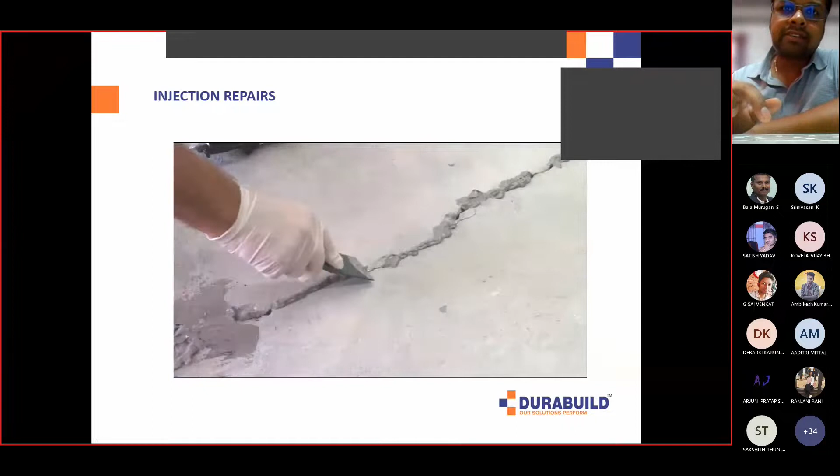Why is he sealing it? Because he will be pumping in a chemical which will go in liquid form, and once it hardens, it will create a hardened material having strength as high as 70 to 80 megapascal. Just imagine. These over here are just packers, through which you will be pouring in the chemical inside.

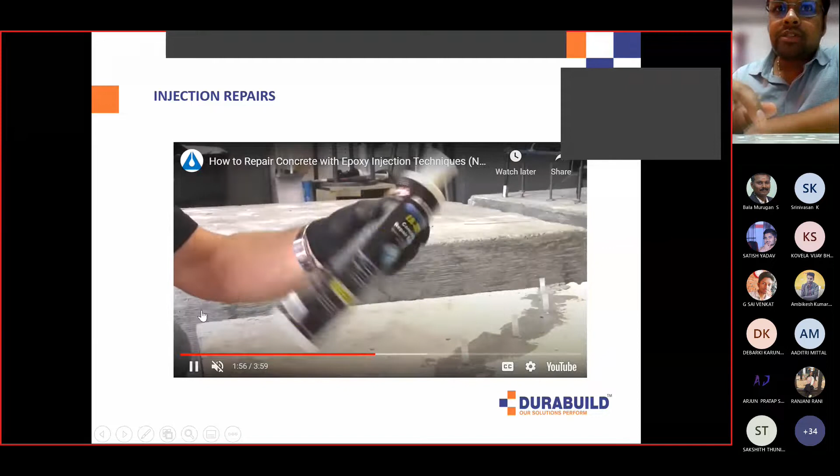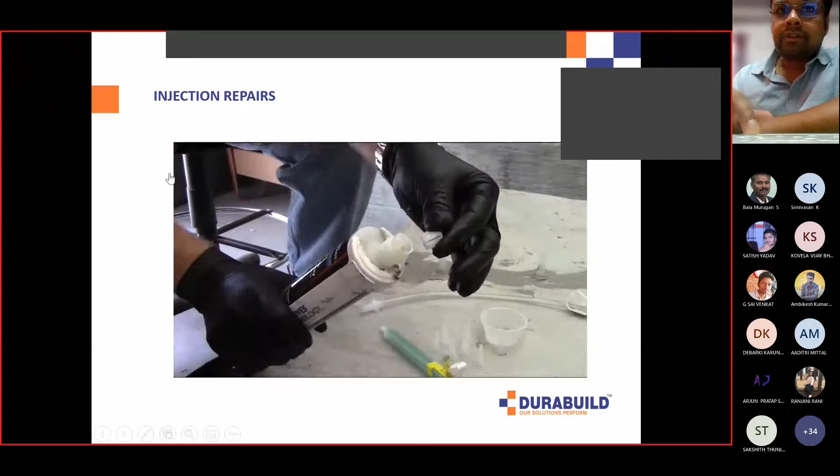So he's just putting it in place. Now he's going to inject the chemical, the epoxy I was talking about. Epoxies are mainly two component products, you will have pack A and pack B. In this case both pack A and pack B are being poured from the same place. When pack A, that is the resin, and the hardener mix together, they will harden and create a very hard material inside that concrete, inside the crack.

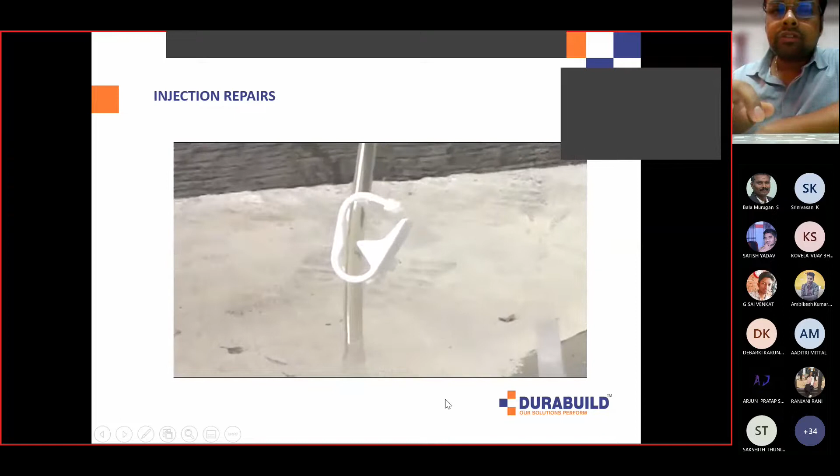Now he is going to show how the injection will happen. He will start the injection, injecting it till the material comes from the next point, the next port. He will inject it till that time. See, the chemical has now come from there. This means that inside that particular crack, this liquid has reached. After around 4-5 or 6 hours, this will harden out, and your entire cracking problem will go away.

So finally, I did tell you about the fact that construction chemicals are contributing to a green footprint. How is it doing that? As I told you, it is first enhancing the durability of your concrete through waterproofing, because it is not allowing water to enter.

Another way is that you can also conserve natural resources like cement. Now cement is also blamed for all the problems in the world, right now the COP26 is happening, people are talking about pollution in the world. The rule of thumb says 1 ton of cement produces around 1 ton of carbon dioxide. So the more cement we lose because of poor concreting and repair and rehabilitation issues, that much cement is getting wasted and more cement is used to repair that material. So you can find ways to save cement also through use of admixtures, which is again a construction chemical.

Another green footprint of construction chemicals is the use of chemicals like fly ash, microsilica, and GGBS. I'm including these under construction chemicals. Microsilica is a classic construction chemical product, a byproduct of silicon industries, used mainly for strengthening concrete.

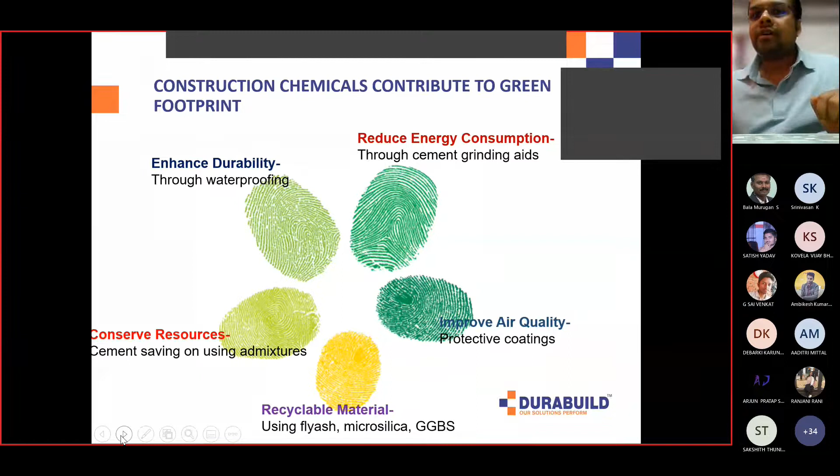Finally, I think I'm done with the entire presentation. I'm well in time, I'm happy to say that. So I have around 10 minutes for discussion.

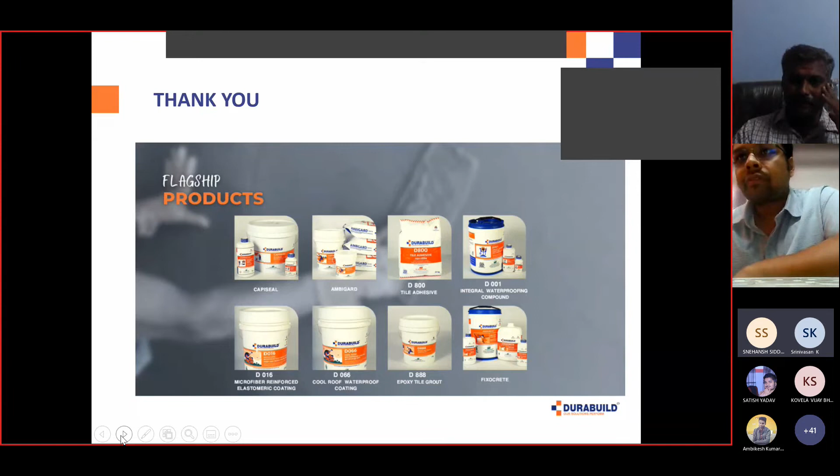Rudrabir sir, Sairam sir is speaking with you. I am very thankful to you because I remembered my old days — you were the person who drove me from the bus stand to IIT Delhi in your own car, I remember that. And I was surprised how you gave a 2-hour lecture, because normally as faculty after 40-45 minutes it becomes very difficult. But I was listening continuously. Industry persons will speak for 3 hours, sir. So I was a little surprised how you managed 2 hours, and I could get some idea how to prolong a lecture for 2 hours. I had one doubt regarding self-leveling.

It's already 16 minutes late. So I'll call you sometime and ask you — I'll take your number from Bala. Only self-leveling was the doubt. I will ask. And I am thankful to Bala Murugan and Srinivasan for allowing me. Welcome, sir. Thank you, sir. Thank you, Rudrabir, for your wonderful lecture.

Thank you, I hope you enjoyed that lecture. We are covering admixtures like superplasticizers — naphthalene based, melamine based, or polycarboxylate ether based — during advanced concrete technology. But there is a lack of coverage on waterproofing, joint sealants, and epoxy flooring — these we are not covering in our syllabus.